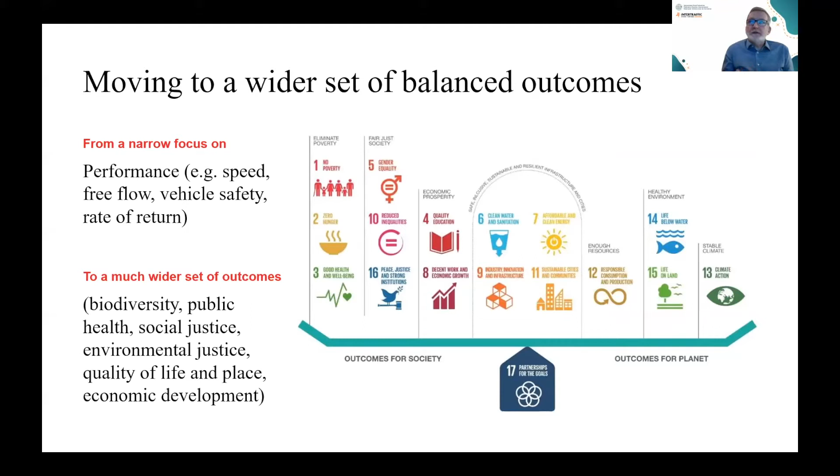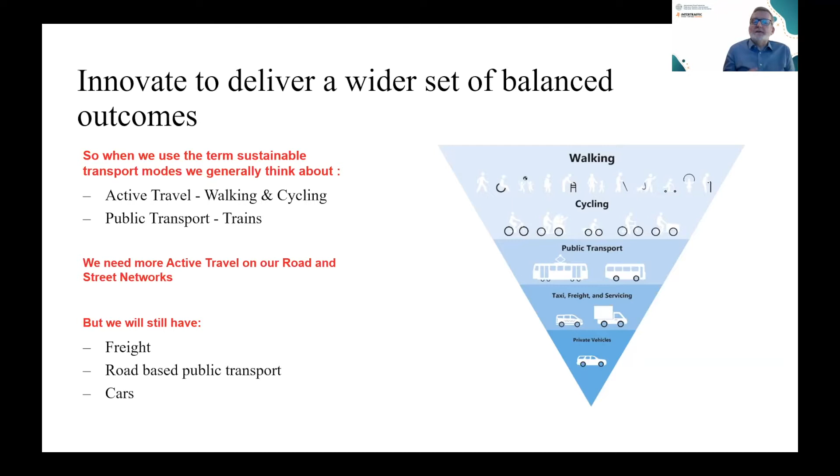They're the outcomes that we want to focus on. So when we talk about balanced outcomes, we talk about sustainable transport, we tend to jump to things like active travel, public transport and trains. And yet we absolutely need to design in more active travel on our roads and street networks. We have to think about the fact that we still will have freight that has to move around our roads. We've got road-based public transport, and journeys that are only capable of taking place in a car. So we have to think about how we innovate to make all of this work well.

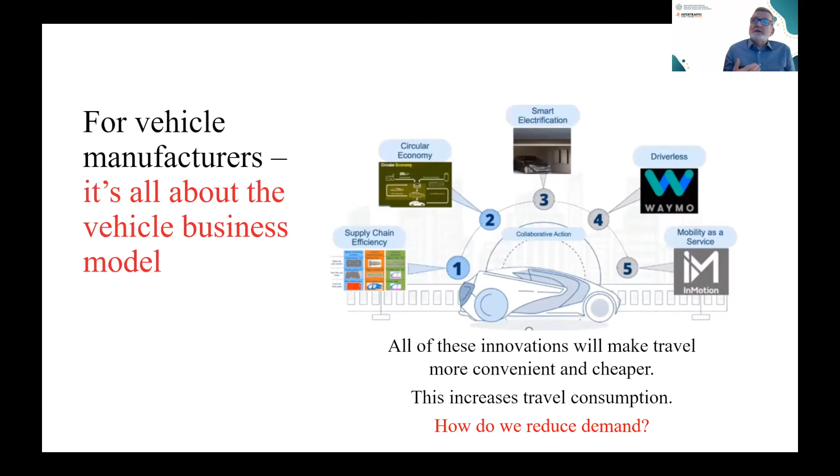For vehicle manufacturers, it often strikes me that for them it's all about the vehicle business model. They're going to make it much easier and more convenient for us to travel in cars. Innovation like driverless technology, different mobility services, different propulsion systems is also going to make travel cheaper. That's going to drive up travel consumption. So how do we manage demand?

So for me, I like to think we need to think about innovation across all aspects of transport. We need to think about how we avoid traveling. This innovation of how we do a Zoom meeting means some of us didn't have to travel today - that reduces demand. Having cities that are well designed so we can walk and cycle to our destination is another way of doing it. And things like road user charging, parking charging - they manage demand as well. And then we think about shifting to more environmentally friendly modes of transport. And only at the end of that do we think about the vehicle propulsion system.

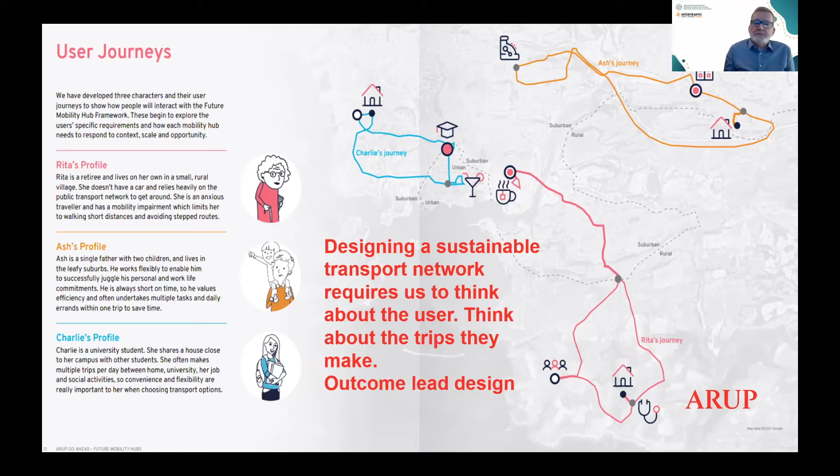So I want to delve into rethinking how we think about transport. Designing a sustainable transport network requires us to think about the user, how they make trips, what they're trying to do as they make their trips. In IRF we call this outcome-led design - we're trying to think about the outcomes of what the user wants to do. So just think about this for a minute: think about how we can innovate across the whole aspect of somebody making a trip, because transport is about the trips that people want to make.

So if you think about somebody who is working, is a parent, on their way to work they have to make several components of their journey. Their journey will include bringing their child to creche or to school, maybe picking up a coffee or a newspaper on the way. Technology can enable people to plan their trips in a much better way - we have information on our phones now about congestion. And when you think about it, we don't travel the same way every day. We adapt what we do depending on the circumstances of that day, what's going on in our lives, what's going on the transport network. We need to think about how we can make those trips more convenient.

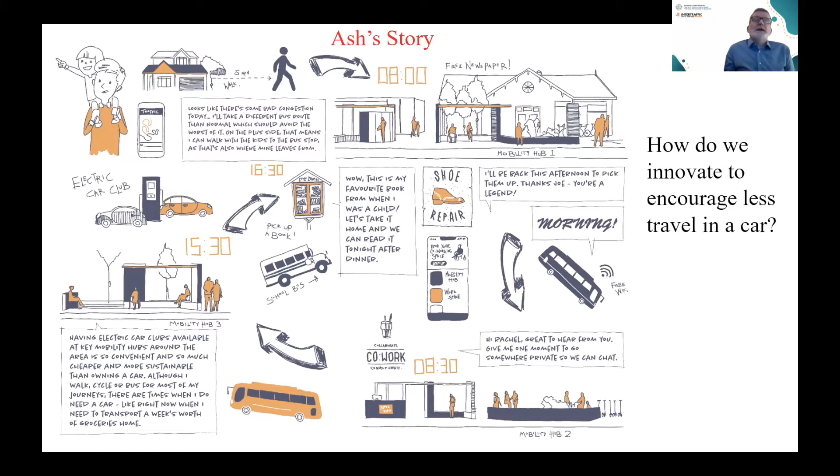We need to think about everybody. I'm a middle-class, middle-aged man - I need to not think about myself when I'm designing transport. We need to think about older people, we need to think about genders, different backgrounds of people. We need to think about all of the trips for all of the users all of the time.

So let's think about how we join a little bit of all of that, thinking about the trips that people are making, and let's innovate how they're going to do their trips. This is a simple concept we've developed with Go-Ahead in the UK - it's about a future mobility hub. It's about how do we put things on our road networks that make it easier and more convenient to use public transport. So it's not just the public transport we need to design for - it's all the ancillary facilities that people need as they make their trips.

They need to be able to cycle to the location. Not everybody can cycle, so there's going to need to be some amount of convenient parking. You need some facilities where you can pick up that coffee as you get on the bus. And these are not just urban solutions - these also need to facilitate people making trips from rural locations into cities.

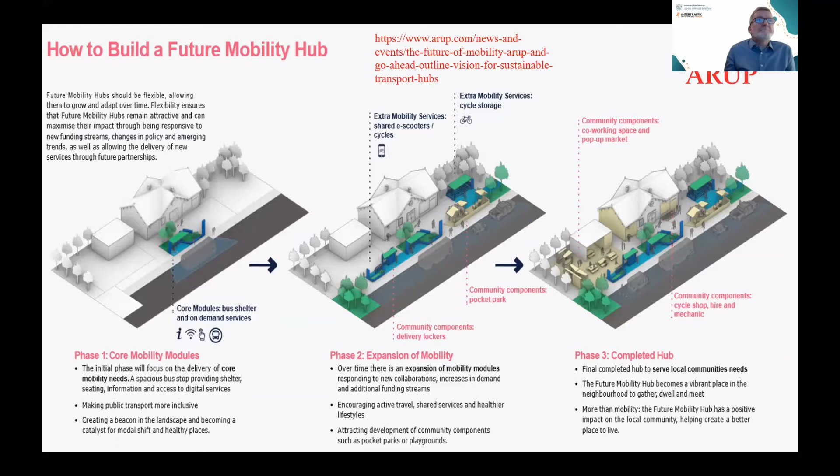So if you need to make this digital design, let's break it down into its components, make it easy to assemble, easy to manufacture so that we can roll it out quickly.

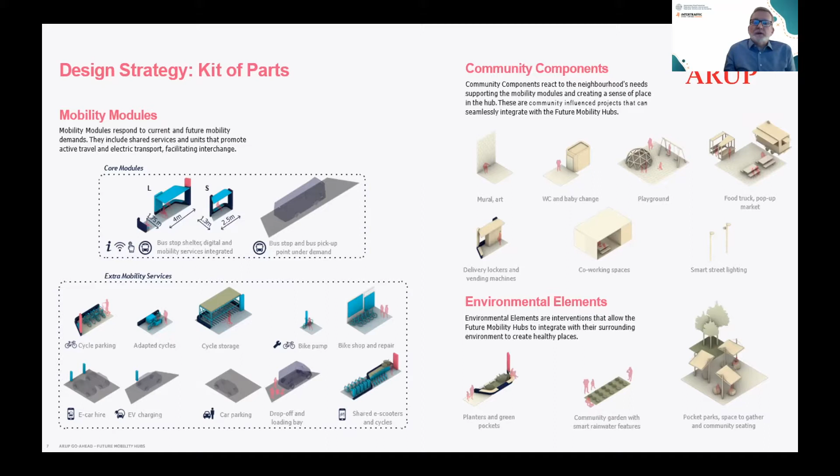And what happens is we apply this gradually. If we do this well, over time, we design cars off our road systems, and then we can do better things in our road and street networks with that space.

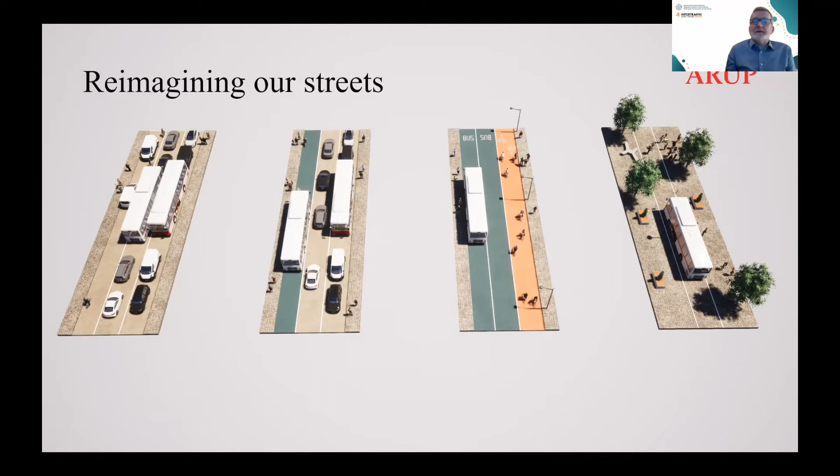I want to think a bit about the difference between what private car design does for a road engineer and how you design public transport. There tends to be a separation between the people who design our national road networks and the people who design our public transport. But what we actually need is more public transport on our road networks, so our road engineers are going to have to think like public transport engineers. In public transport, we think about how we change mode, the interchange effect. We need our road engineers, people like me, to think like that as well, and that's about how you bring the road onto the public transport network.

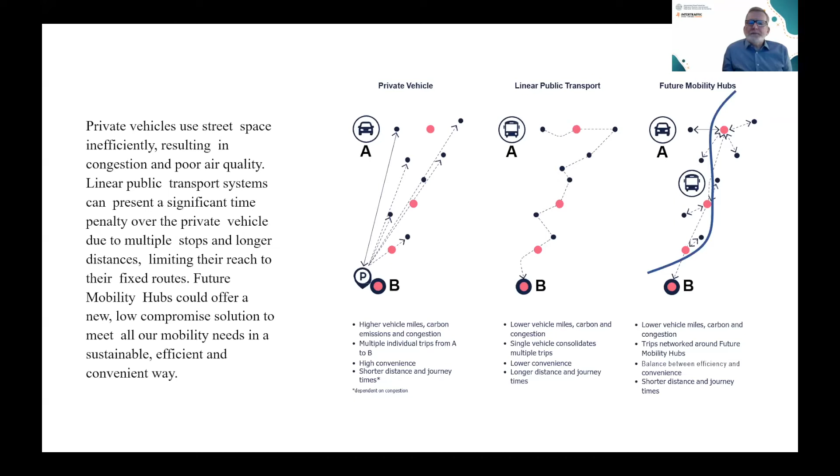I'm going to tease this out a little bit more. This involves us rethinking how we think about people moving. So when I spoke about the different types of people making trips and how they use the networks, that's a different way to think about traveling. It involves us modeling things differently. Our existing modeling systems tend to think that people make the same trip in the same way every day. That's not what actually people do.

So we've developed techniques like agent-based modeling, where we make a synthetic population in the model. We allow the population to change their behavior through the day, and this gives us the ability to predict that people will make different journeys at different times of the day, using different modes and different routes. If we do it well enough and iterate it enough, this makes us better able to predict what's happening. We want to make decisions based on how individuals actually behave, which evolves over time and doesn't always follow a regular pattern.

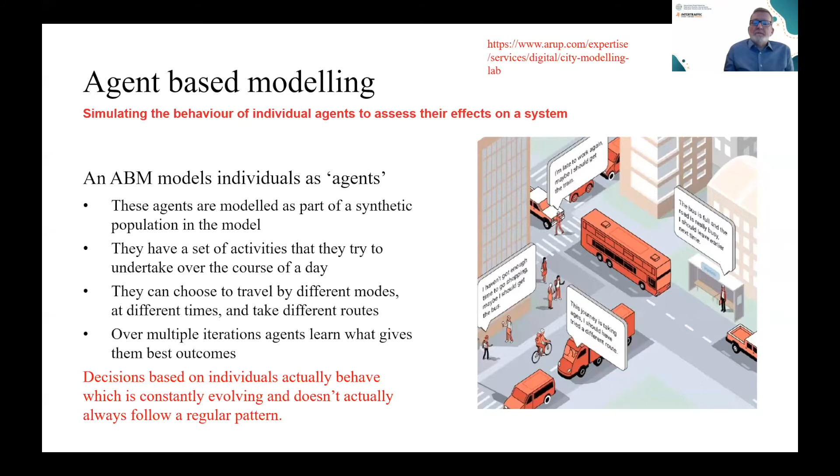So what I'd like to do now is bring this thinking onto a road network. I'm going to go through six themes as we do this. I forgot to say, a lot of this thinking is on our website at arup.com.

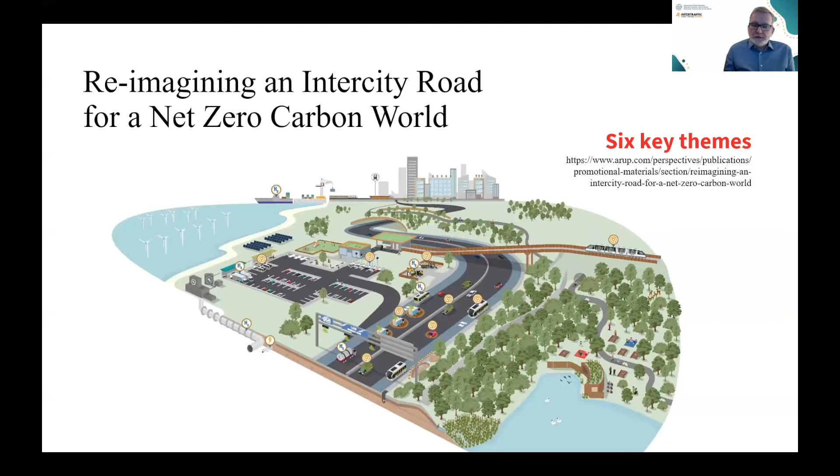You're beginning to hear me talk about thinking of our road network as a multimodal platform, which allows us to deliver sustainable mobility. We need to innovate the way we think about our road networks to achieve that. Rather than thinking of a road network as something just for one mode, where the trip is completed in one mode, for example a car, we need to think about people changing modes as they complete their trip. We can imagine people driving to the edge of the city, changing mode onto more sustainable, more convenient modes to travel into the city. So we have to allow for the interchange between the car and the train system, as you see on this graphic, and think that maybe people will be cycling to these locations. How do we actually think about that?

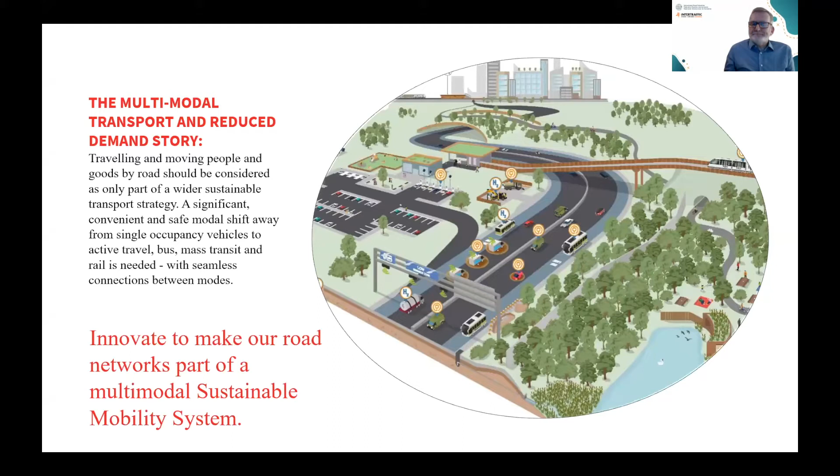Let's go a step further. The transport network is part of a transport system, and the transport system is part of a system of systems. So there's another concept we can think about: the land use story. Our road networks take up a massive amount of land, and maybe we can use that resource for more than just the road network, for more than just the transport system.

This is about thinking how we bring ecosystem services into our thinking. How do we design that in? How can we maybe use all that road network we have for biodiversity net gain? Our road networks would have removed biodiversity when they were constructed, and there's an opportunity to begin doing a bit of regenerative design, trying to put back into our environment some of the things we've taken out of it.

The example I show here on the screen is where we've used the road corridor as a linear network. It is an ecological corridor for flora and fauna. We reconnect it with other ecological corridors, and it becomes part of a refuge within an intensely managed landscape.

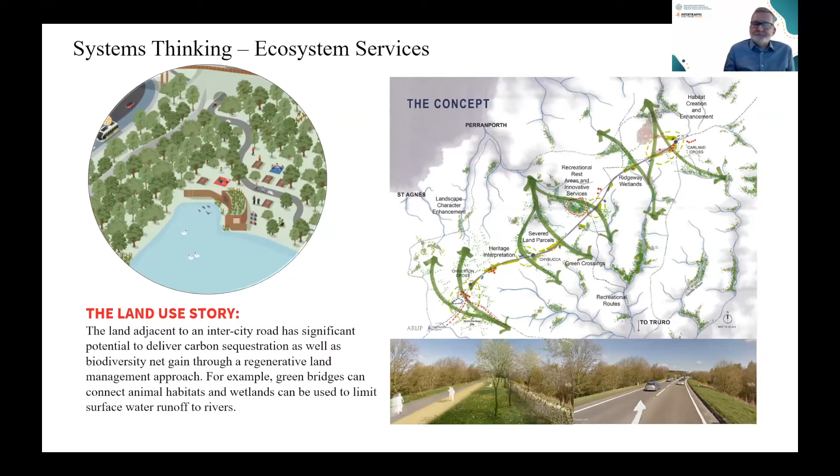Let's just take that a bit further.

So we know we need to reduce emissions from transport. We also need to manage the carbon that's used in the operation, maintenance, and construction of our road networks. This is where we bring in the innovation so we can think about how we apply the circular economy in detail.

A couple of concepts worth thinking about here: we need to maintain what we have, we need to carefully retain the value. It costs a lot of money to construct our road networks, so we need to retain that value. We need to optimize what we already have, and it's only then, once we've maintained and optimized, that we get to think about building new networks.

Maybe we don't need to build anything in the first place. The circular economy begins at R0 or R1, where you can retain what you have, rethink what you're doing, and maybe you don't need to build anything in the first place.

A great example here locally is a project the team in Amsterdam worked on in the Netherlands, the Van Brienenoord Bridge. In the refurbishment of that bridge, one of the arches, we removed the arch, took it away, completely refurbished it, and put it back into place for a new life. That involved a lot of innovation — in this case, the digital analytical techniques we used to analyze the bridge.

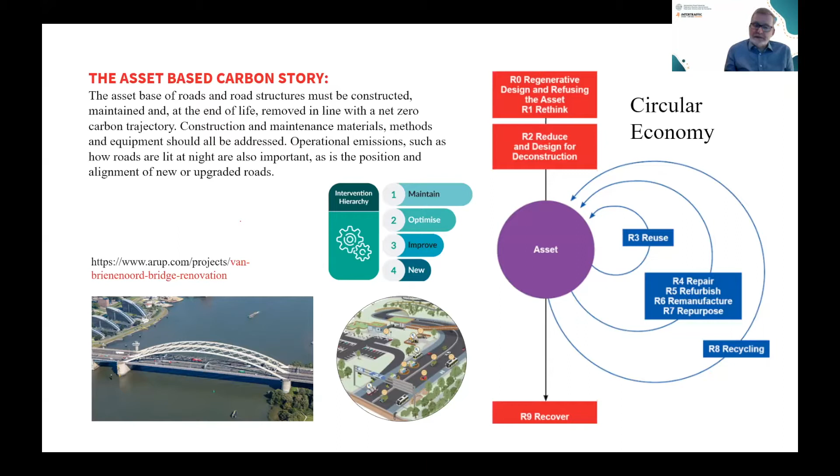Thinking a little further into the circular economy, what's that going to look like in practice? What I've done here is taken Stewart Brand's concept of shearing layers, used in building design, and applied it to road construction.

As engineers, we sometimes have an obsession about designing for durability. Maybe we need to think about the fact that not everything lasts forever. We have some things that don't last particularly long, and we need to think about how those components of what we're building will be deliberately reused, recycled, or repurposed.

If you take the asphalt layer, the upper layers need to be deliberately designed so they can be reincorporated into asphalt for a second life, maybe a third life. We need to put the components we know will be replaced in places where they can easily be taken out and replaced, without requiring more durable components to be broken out.

There are other components to that too. What I'm beginning to talk about there is designing for disassembly. We need to do life cycle analysis on what we're designing and providing, so that we come up with the right decision, both in terms of reusability and the cost and management of the material.

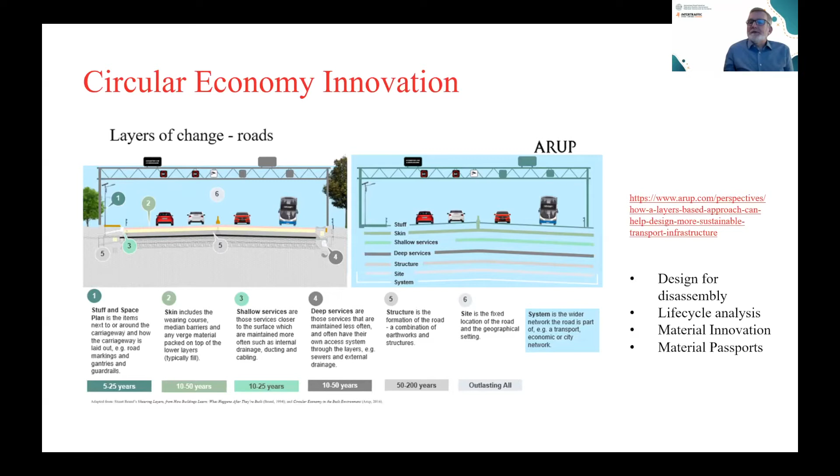That brings us into innovation in terms of how we do our asset management and building information management, so that we have digital twins so we can optimize how all of this works.

So another thing we can talk about — I've gone a bit over time — is that we need to design for low emission vehicles. We need to not just think that having low emission vehicles will solve the problem. We need to focus on reducing the amount of travel, have clean air zones, and enable people across all economic circumstances to avail of this technology.

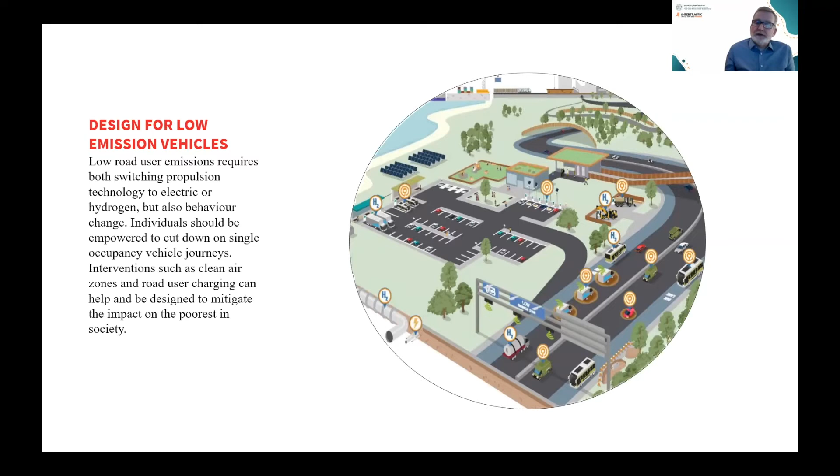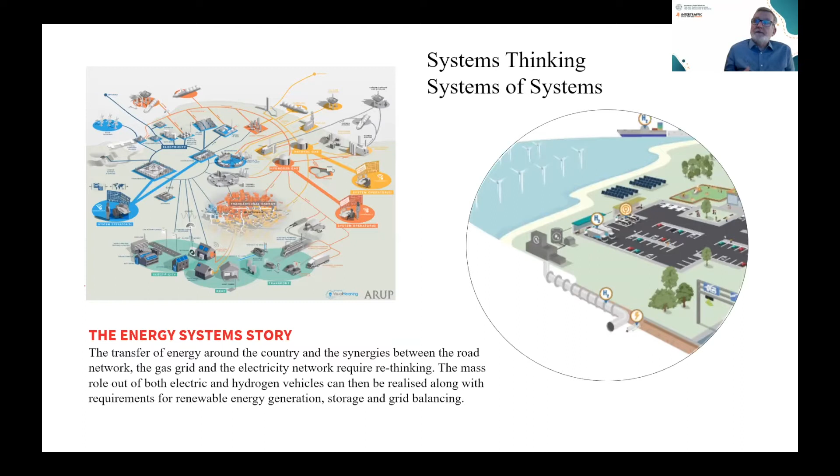I want to briefly mention systems thinking — the systems of systems in terms of ecosystems, but that also applies to the energy system. Our transport system is going to interact in a much more particular way with the energy system, and we need to think about how our transport system can deliver innovation for the energy system as well.

Technology and digital — we all understand that how we plan our journeys is going to improve, how we use connected autonomous vehicles is going to improve what we do, and apps are going to make it easier for us all to travel.

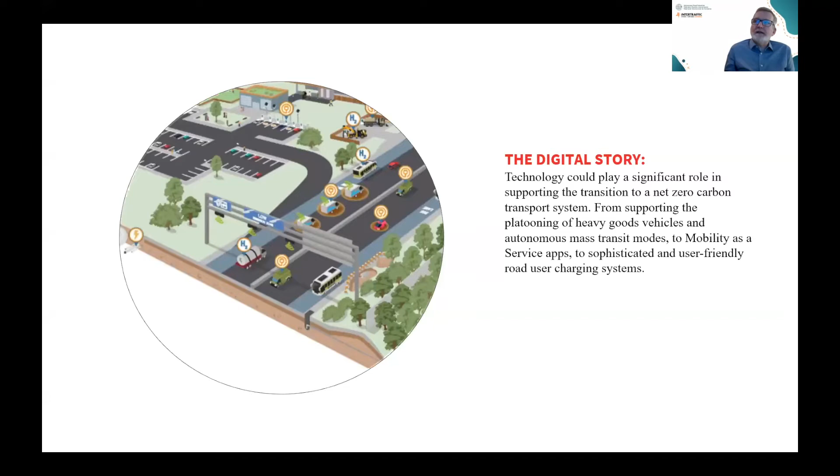I'll leave you with one final thought: we need to think about how we actually use that technology to take away transport, if you like. This is a piece of work we did in Singapore. I'm talking about autonomous vehicles, trying to think about how we shift the innovation away from the vehicle itself.

Instead, the innovation shifts to the use of space — using the autonomous vehicle as an opportunity to take away the space allocated to cars, so it can actually be used for active mobility, regenerative design, and climate change resilience.

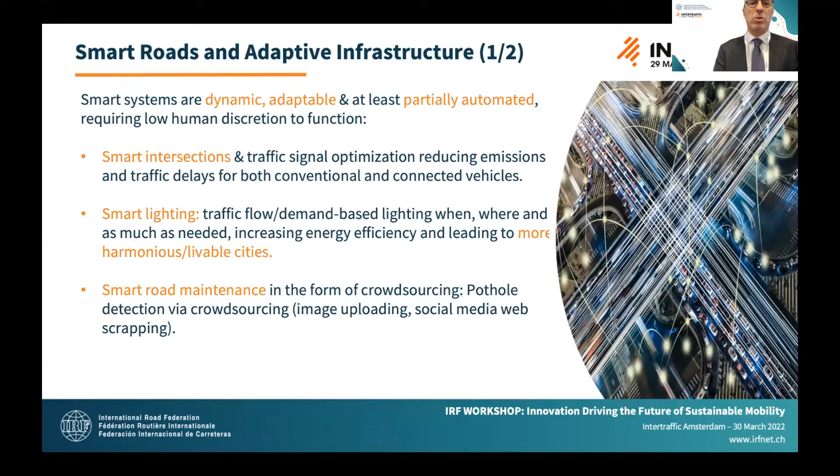In fact, smart roads and adaptive infrastructure are supposed to be dynamic, adaptable, and at least partially automated, still requiring human intervention. We're talking about smart intersections with traffic signal optimization, smart lighting, smart road maintenance. We also talk about dedicated lanes for connected and automated vehicles, optimizing on-street parking, green light optimal speed advisory, road use pricing, and there are quite a few impacts at different levels.

Direct impacts on the road user, on the authorities and the operators, systemic impacts within the transport system boundaries like modal split, and of course wider impacts exceeding transport system boundaries with emissions, with health, with every sector. So we need to estimate and anticipate these impacts.

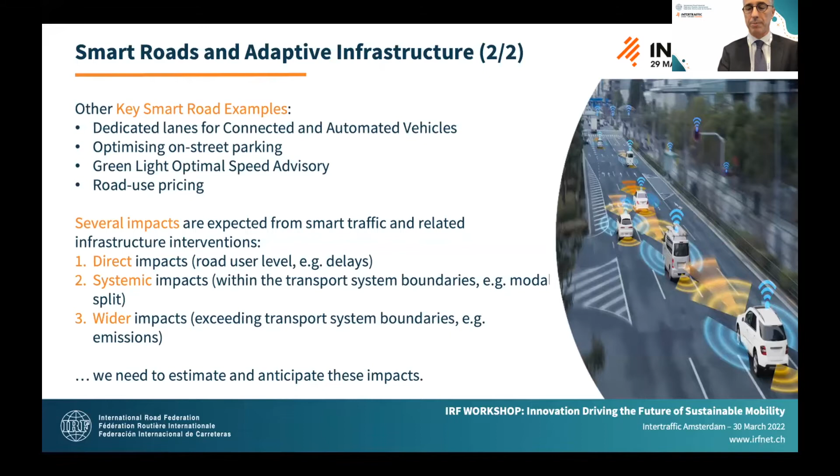In terms of smart motorways, they are expanding quickly, not never as quickly as we wish. There is mandatory speed control, automatic signal setting, and speed enforcement using automatic camera technology, which are more and more present in smart motorways. There are significant gains, potential significant gains in environmental impacts in order to upscale traffic volumes, platooning, and their percentages of use.

However, smart motorways have not yet improved road safety uniformly, and quite an important percentage of drivers are not even aware of the new traffic safety and environmental potential of new systems.

The key challenges for smart roads, of course, is open and big data. The silo effect today hinders data sharing due to privacy, legal liability, intellectual property, competition, cybersecurity, and cost-related issues, and we have to overcome them.

We need a smart solution with systematic resilience, scalability, timeliness, and interoperability. Artificial intelligence has to be explainable and fair in order to fully exploit big data. And policymakers have to develop digital skills themselves in parallel with the progress of technology.

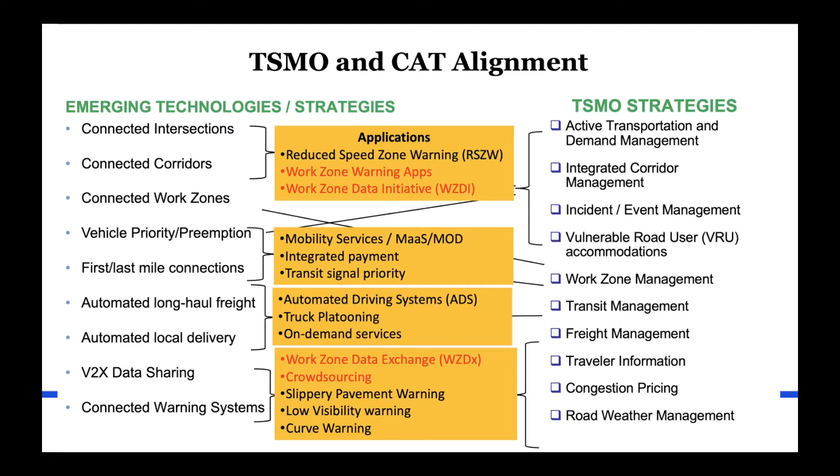If you want to sustain mobility, you need to make sure that the strategies are in place. They are the driving engine to implement the technology for the benefit of the network and for the benefit of the users.

This is another important point: we are currently working on key use cases. For example, AV applications in work zones is one of our prominent use cases. Some of the TSMO use cases becoming very popular include road weather information systems, work zones, connected and AV vehicles, red light warning, arterial operations on red light warning, reduced speed zone warnings, and corridors.

Connecting corridors with technology, basically modernizing signal control cabinets and ensuring signal operations are efficient, is one of our top use cases, including lane departure for arterials as well as interstate systems. The multimodal intelligent signal system includes transit signal priority, but also connects with other modes like metro, light rail, and heavy rail, making sure those intersection points are well covered.

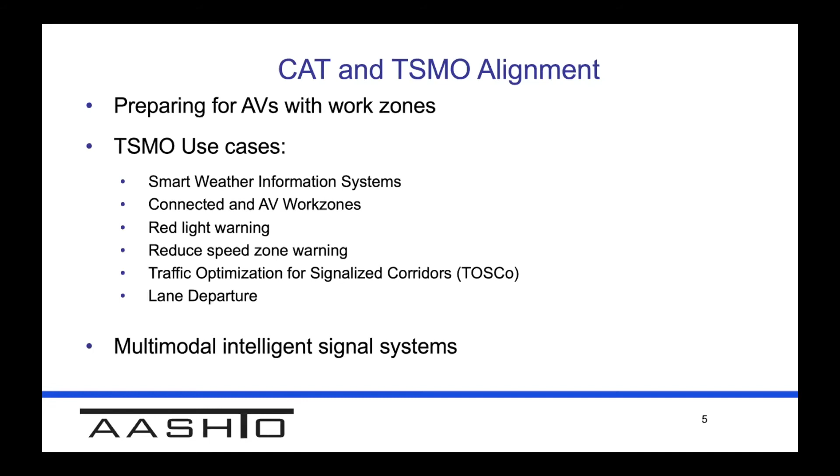One of the speakers brought up outputs and outcomes, I'll speak to that in a minute. One important thing we've come around to is the decision support system. One of the major TSMO initiatives was Integrated Corridor Management, ICM systems, and the DSS system that came out of that has become a sustainable model to ensure any TSMO strategy implemented has an actionable decision support system built around it—whether it's a weather program, incident management, or congestion pricing. What transportation decision comes out of those implementation efforts to help manage the system in a timely, responsive manner?

That's one of the key things we're looking at, implementing an artificial intelligence approach. Predictive algorithms going into the DSS would make it more robust and modernized to accommodate emerging technologies into the program applications. And then how does it impact the workforce? Do we have the skill set available to absorb emerging technologies and accommodate these latest innovations into the program?

Go to the next slide, please.

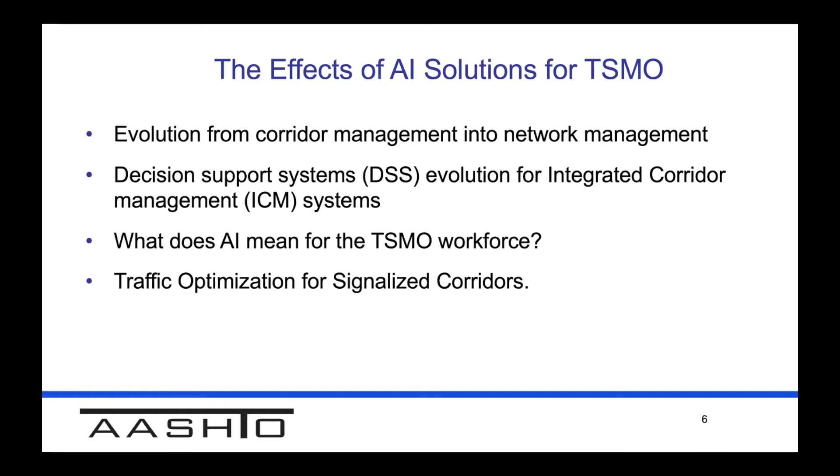This is another big paradigm shift we're experiencing with our stakeholders. There were outputs, a data-rich information pool—we've talked about that in the past. Sometimes there's more data, but no information out of that. Now, in a similar context, we're looking at: are we just focusing on outputs, and are we not focusing on outcomes?

If you implement a congestion pricing strategy or active traffic management strategy, besides the strategy itself clicking and all technologies working, giving the desired measures—for example, reduction in delay, or congestion pricing giving enough balance on traffic volumes on general purpose lanes versus the Lexus lanes or toll lanes—is it really helping the user achieve the end product of mobility? That he reached his destination, and connected with first mile, last mile services efficiently.

There's also safety. If you make a good weather prediction, is it trickling down into shifting the peak hour from a weather event to a non-weather peak hour? Those are the outcomes that are important to measure. That's where we're focusing—how the strategies and technology implementations I presented will ultimately connect back to the outcomes.

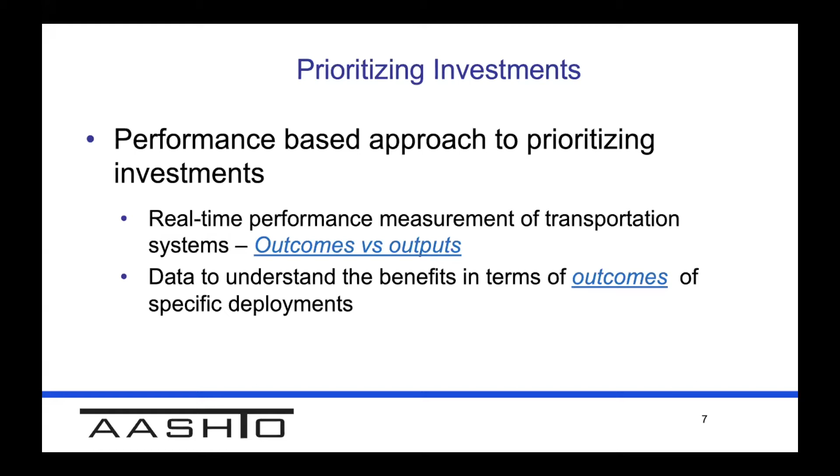Next slide, please. To accommodate all these discussions, we've also embarked on generating a transportation operations manual. This research has been in the works for the last 24 months, and this year we're nearing completion—balloting within our AASHTO committees and adopting the manual by end of this year, probably releasing it by TRB 2023.

This is our major flagship project this year, and it connects with all the earlier strategies, outcomes, and technology implementations I was talking about. We'll be happy to share this as it becomes available with this new committee being launched today, which I'm sure will be very interested in interacting with our AASHTO committees as well as this manual. Last slide, please.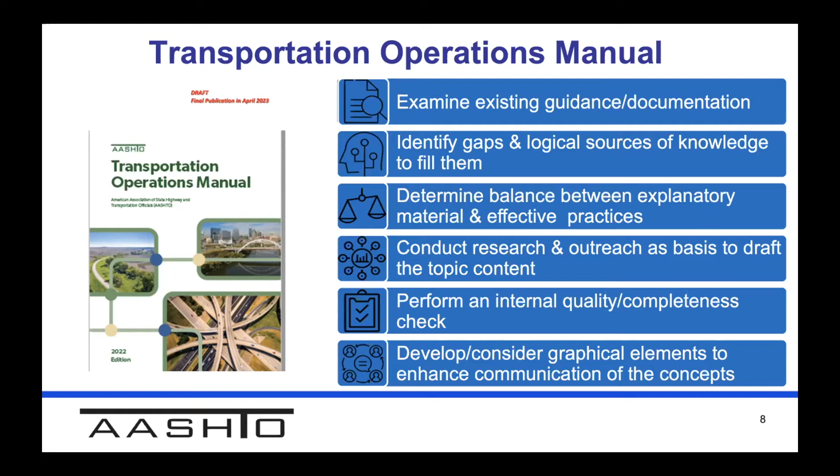This starting step is expected to add more companion documents, making it more robust and available mainly in digital version. We'll take more input from industry trends and complete it in future years as a long-standing available service tool for our TSMO communities within the United States and outside as well. Those are my takeaway points, and thanks for the opportunity—I'm here for any questions.

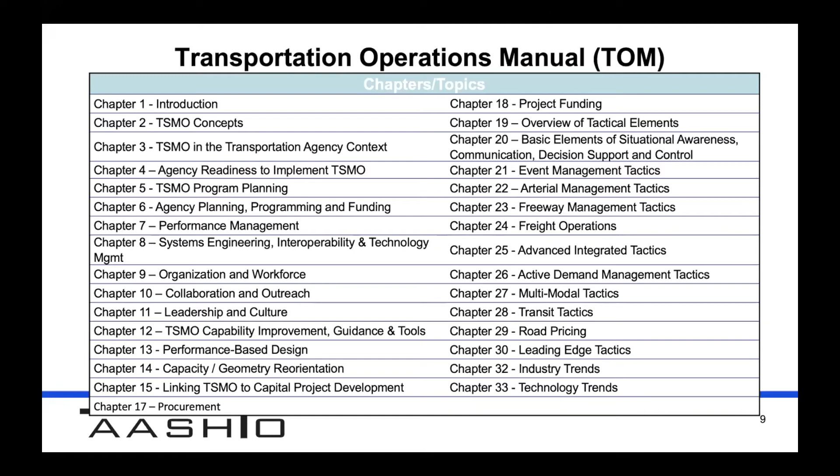Thanks a lot, Kumara, for being with us this morning. I wish you a great day there in Washington, and I look forward to working with you on this new committee we're launching. We've already cooperated with AASHTO on the committee we have on connected and autonomous mobility, so we're definitely continuing on that line of work.

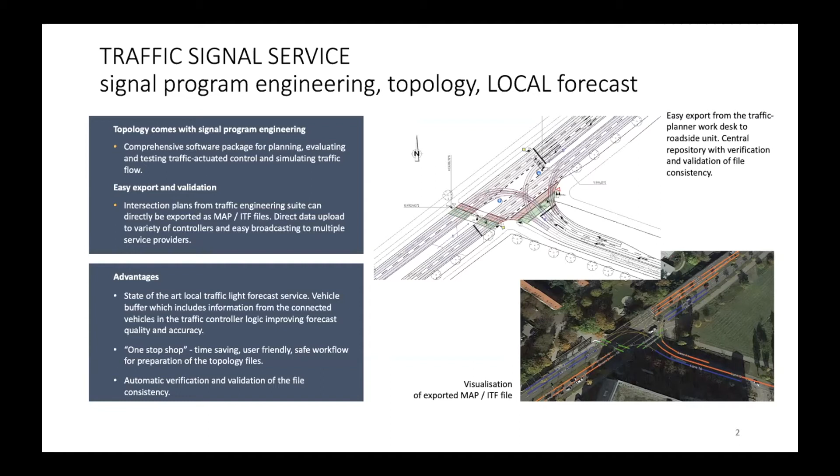This tool started at the university. Traffic engineers are learning with it how to plan and configure a traffic system in a city. Cities are using it as well as consulting companies. It's really a digital tool, and we use it a lot in Germany as well as in the rest of the world.

The next use case is public transport priority. Here we have real-time communication between the bus or tram and the traffic signals. This helps a lot to improve the customer journey of the people who use the bus, as we have better consistency in the schedule—buses are more on time. CO2 reduction is also an argument here, and we can scale this over different intersections into a corridor.

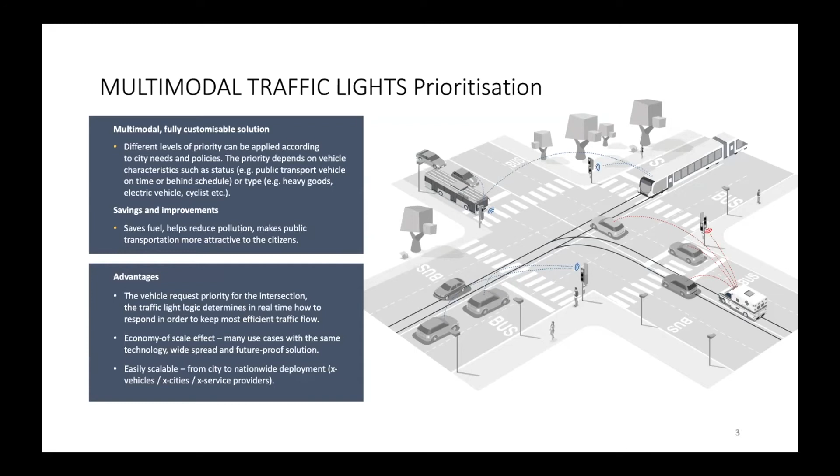A similar use case from the same technology is emergency priority. Everybody knows the congestion spillback when there's an alarm of an emergency vehicle and everybody drives onto the intersection and stops, while the vehicle tries to get through. With a real-time connection to the traffic signal and the intersection, we can directly manage the traffic as well as a corridor so the emergency vehicle has a safer path through the intersection. It's a low cost and quick deployment solution.

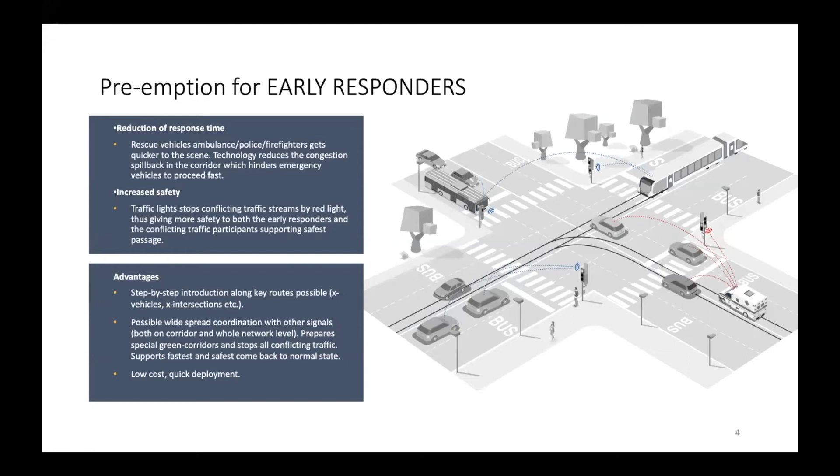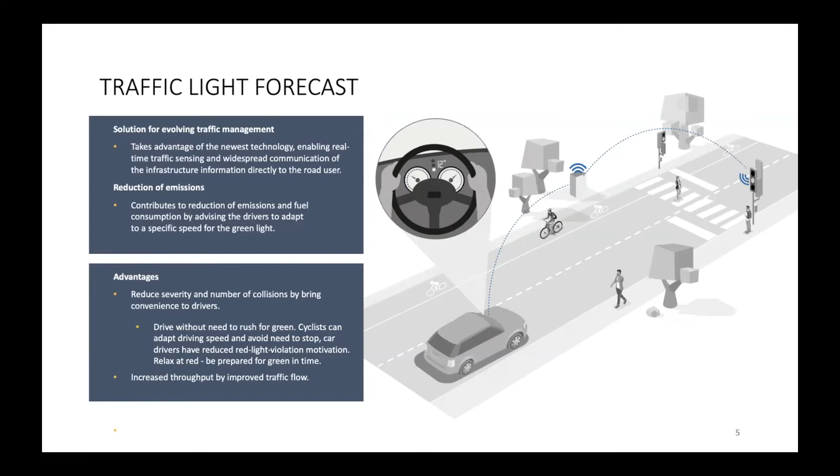The traffic light forecast is another one. We provide this information not only in the car dashboard, as you see here, but also on a mobile phone. So as a cyclist on a bicycle, you can see if I drive at 20 or 18 km/h, I'll get the next green light and won't need to stop. Same for cars—you don't have the pressure of not knowing if you can make the green. It relaxes the driver heavily and also improves traffic flow in general.

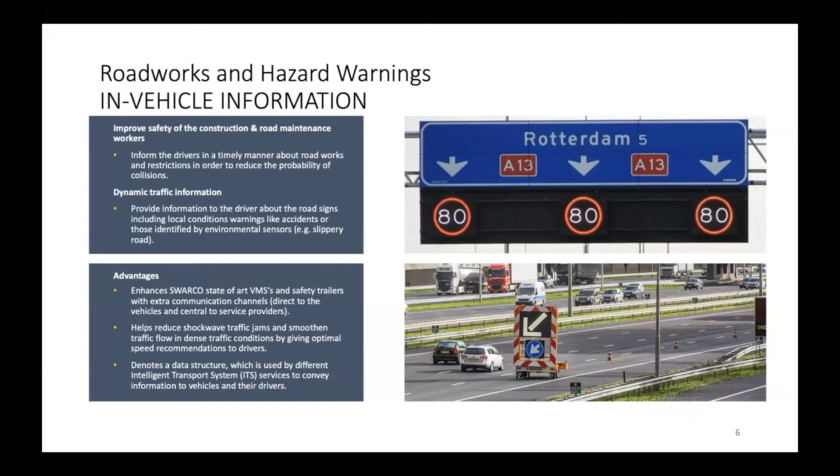The next one is roadworks and hazard warnings. With in-vehicle information plus variable message signs, including mobile variable message signs as seen in the picture, we take environmental sensor and camera data with accident information or slippery conditions or other incidents, and then we can smartly manage the roads—for example, from 3 lanes down to 1—to help reduce shockwave traffic jams. Another example is hard shoulder and emergency lane management in a smart way, which also helps keep traffic smooth.

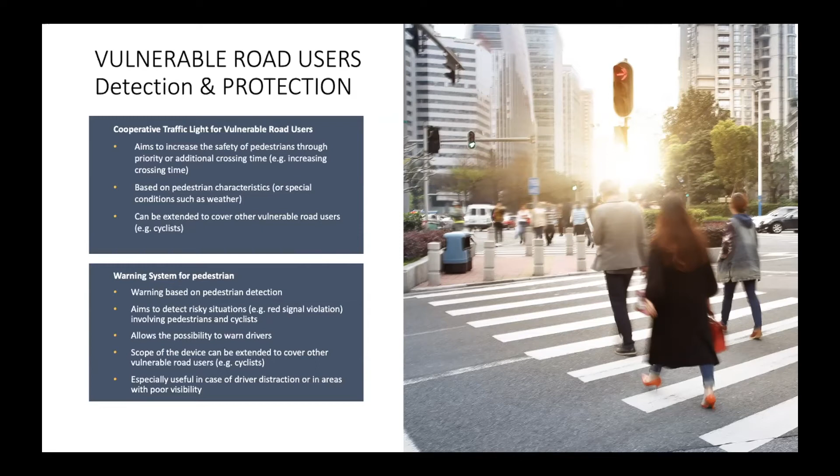Another very nice use case is for vulnerable road users. Here we think about bicycles at an intersection with trucks turning right, which sometimes have a blind spot and can't see the bicycles, leading to bad accidents. With cameras, we can analyze if there's a bicycle and a truck in a critical situation, and we can, for example, give the truck driver 6 seconds longer red to secure the crossing of the cyclist over the intersection. This heavily reduces bicycle accidents in the city. Another use case is also for pedestrians.

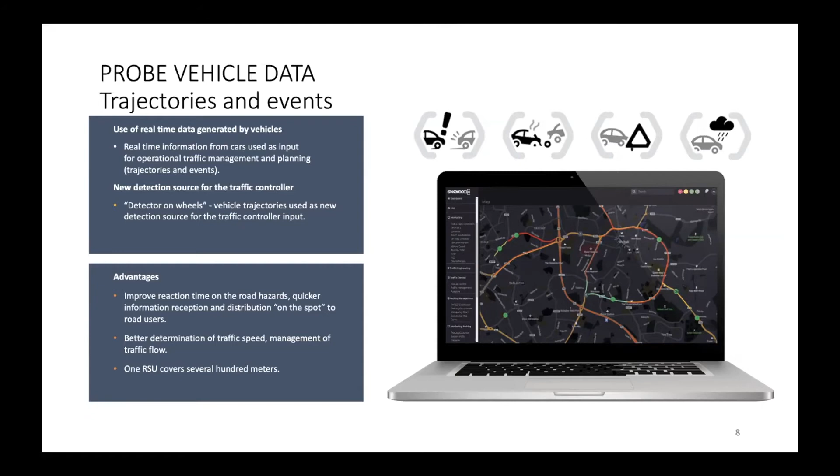Then we have the heat map of the real-time traffic data coming from different sensors and car communication, which helps us see exactly what's happening in the city, where the traffic jams are, etc. And then we can directly improve our traffic management through this in a specific way.

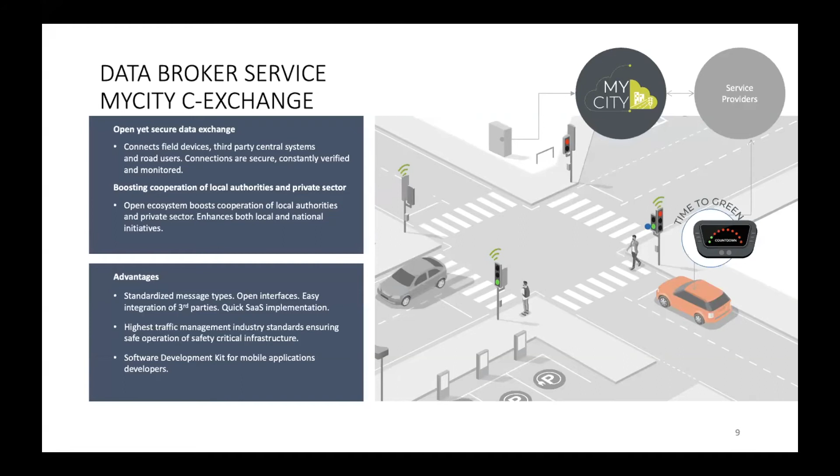The last one is the data broker service. We have complete analytics of the intersections with data about pedestrians, cyclists, cars, trucks, peak times, trams, etc. And we can provide this in an open interface to the city or to third parties as a service, for applications, also for startups interested if they want to create special applications on it. And this is a very good data source for any new use case in the future.

And that's it already. Thank you very much. And if you have questions, I'm here.

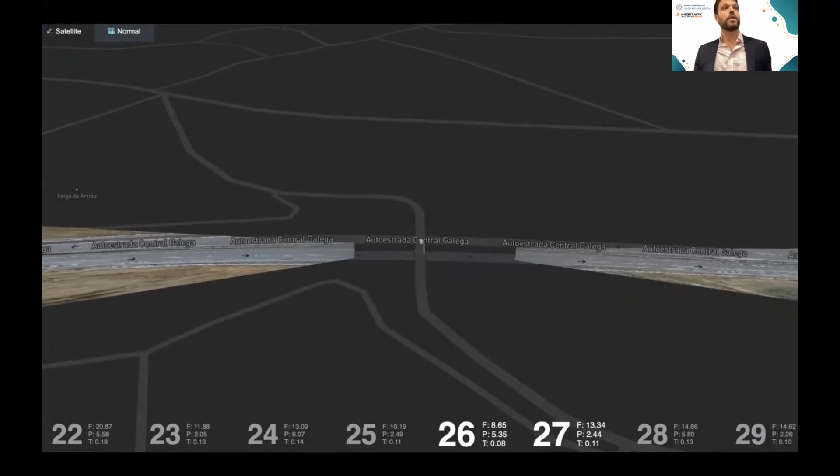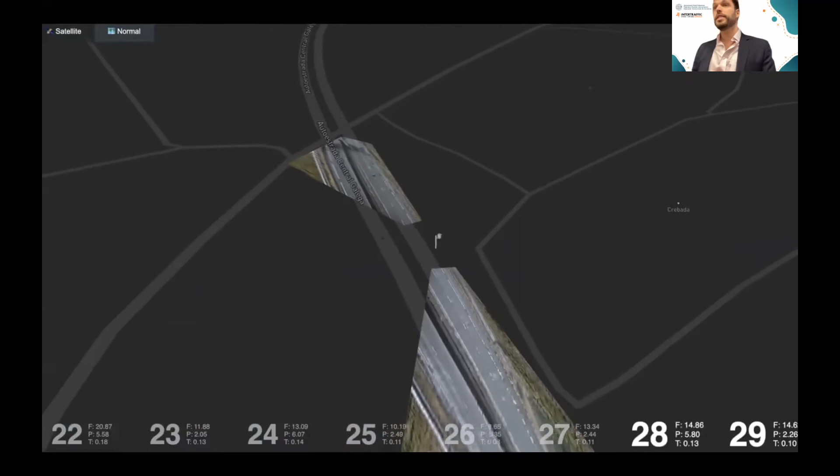So what we've created is a system that automatically detects exactly where the camera is looking and transposes that perfectly onto your map. What that means is that when you see, in this capture of a live road, a car in your camera, you now see it actually driving along your road precisely.

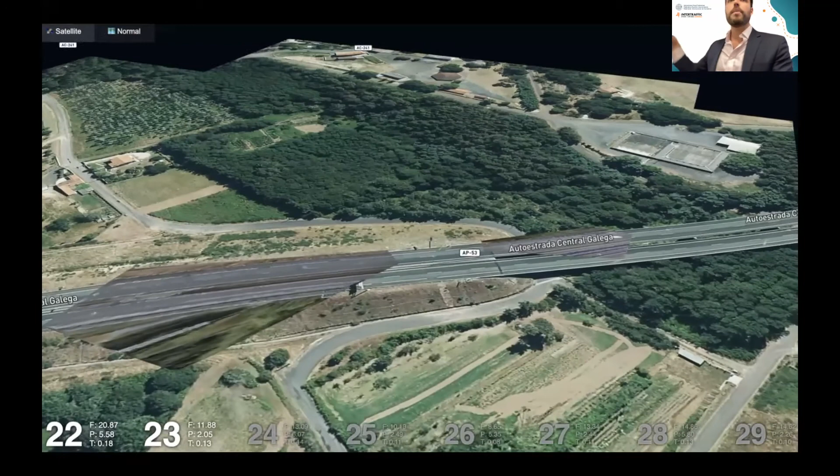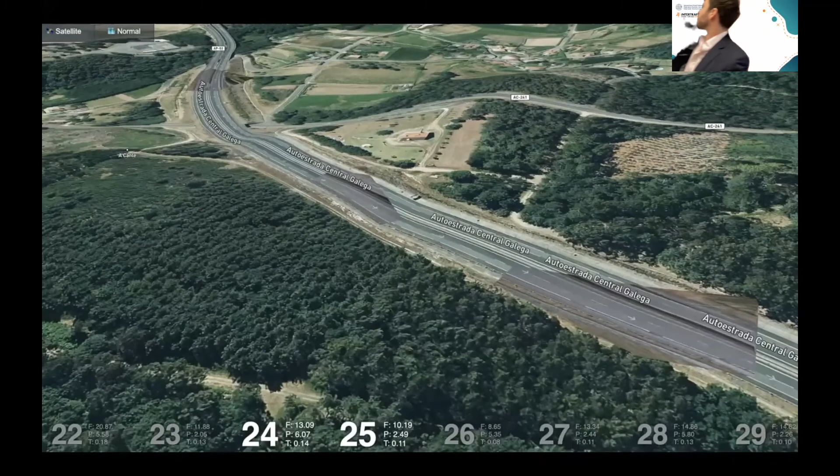Now, the reason that's important is that when you have that Waze event in a specific coordinate system, you're able to know that's the same thing I see from my camera. Here you see this transposed on a satellite image showing you how precise this automated process is. So now if I have an incident detected here, and down the road I have congestion from a loop, and then Waze coming up, all this is interrelated on the same coordinate system. And that is why I'm able to trust it better.

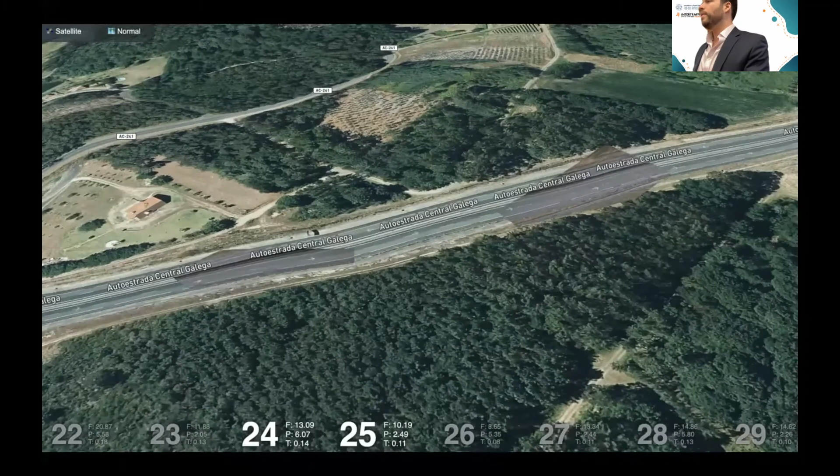That's just one example. We could talk about radar, we could talk about connected vehicles, but later. This can even be provided, if you have your own ATMS system, as a module within that ATMS system. What we found is a lot of roads have nothing because a lot of systems are too expensive. So for those who have little ITS, we provide our own web-based application.

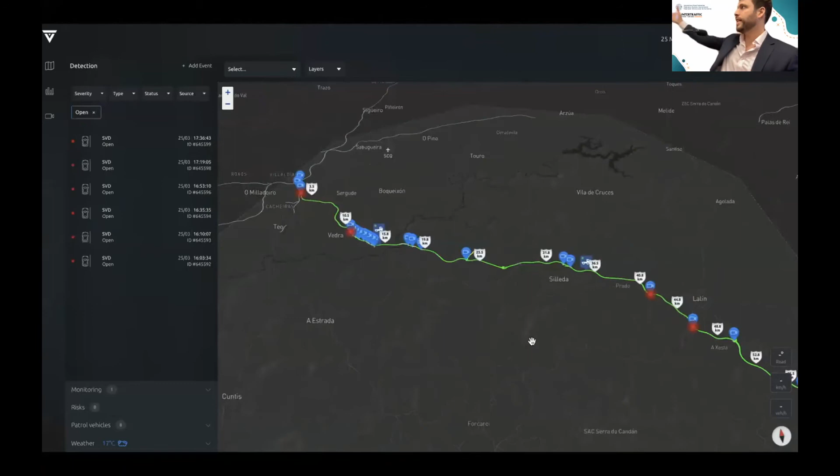So this is Lantern by Valerann. Here we bring all the data sources together. For example, if you have an alert, let's say Waze says there's a stopped vehicle detected, we provide you the alert and its location. Then we show you the closest camera.

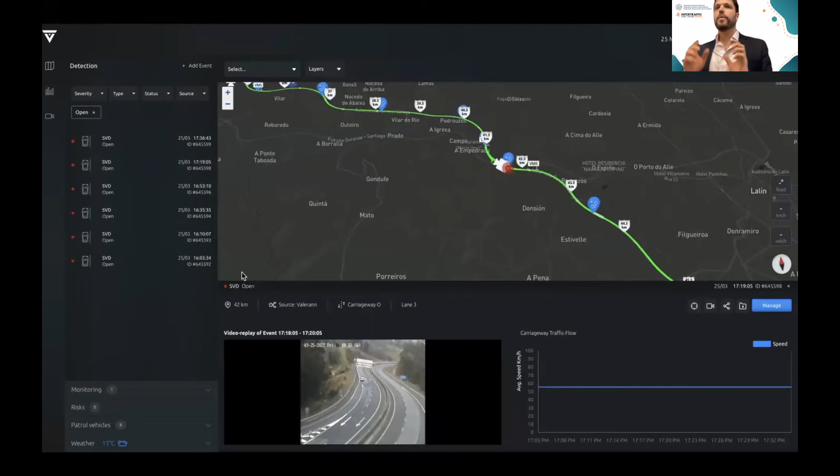We give you both a video capture of that event, so those 2 minutes you see the vehicle as it's actually stopping, because we assess when that more or less happened and where. And then we also connect you to your live camera at the same time, so you can say, oh, is it actually still happening? It's not.

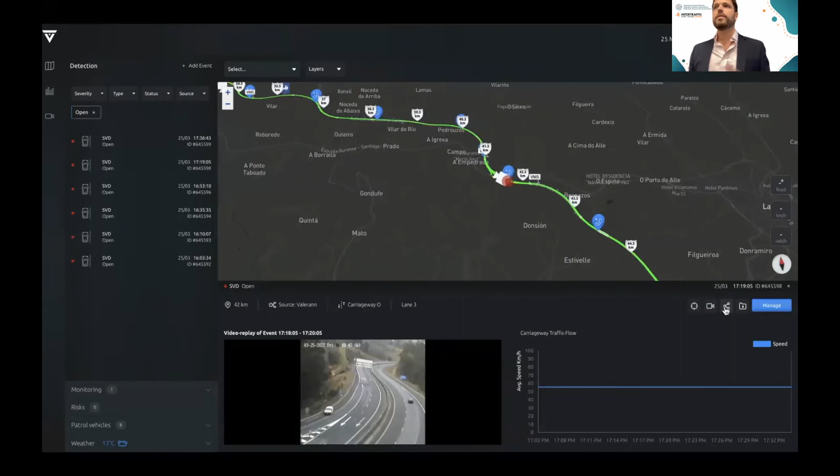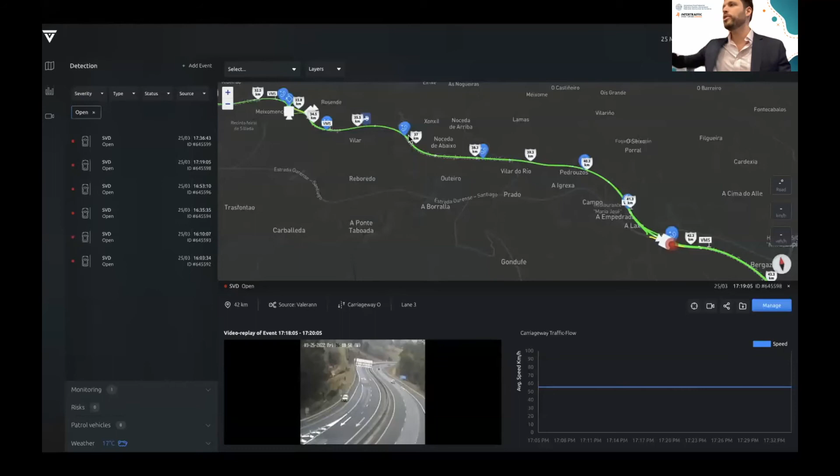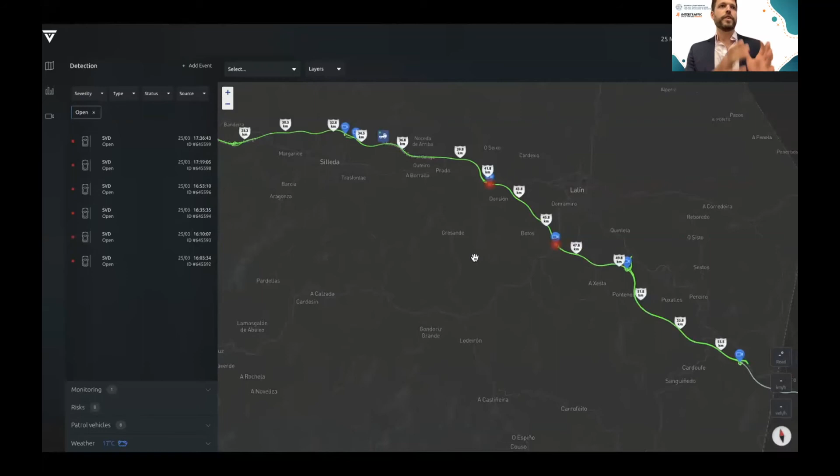Then connect you either to Waze, to Google Maps, to your internal systems, Slack, email, or your emergency response, whatever you need. They can also have access to this if they want to see it, say emergency response here, take a video so you can see what you're going towards. And at the end of all this, if you want, connect your patrol or anything like this. Again, improving your connectivity, improving your certainty, and allowing you to react faster, more relevantly, more effectively to what's happening on your road.

So in summary, Valerann and Lantern by Valerann, what we just saw, we want to help road operators increase safety, reduce congestion, save costs, and engage users on your road to keep them more informed. We do that by facilitating trust in the data you already have. That means you can reduce response time to accidents, identify and react to bottlenecks sooner, start leveraging ITS with reduced cost without the amount of CapEx, as my colleague said before, and also communicate directly with your drivers, so you have a wider, more profound relationship with your users, your constituency.

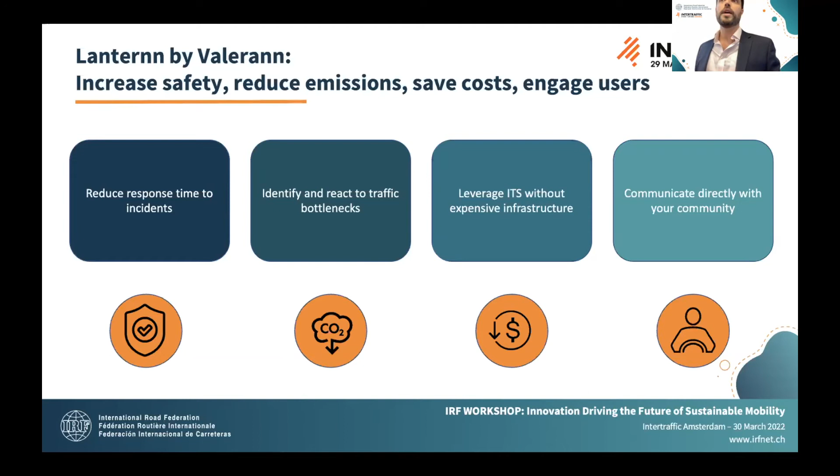And I think it was a perfect conclusion for this session on technology. We've seen tools, we've seen the importance of data and the strategic thinking behind it, and that all together brings innovation in our sector.

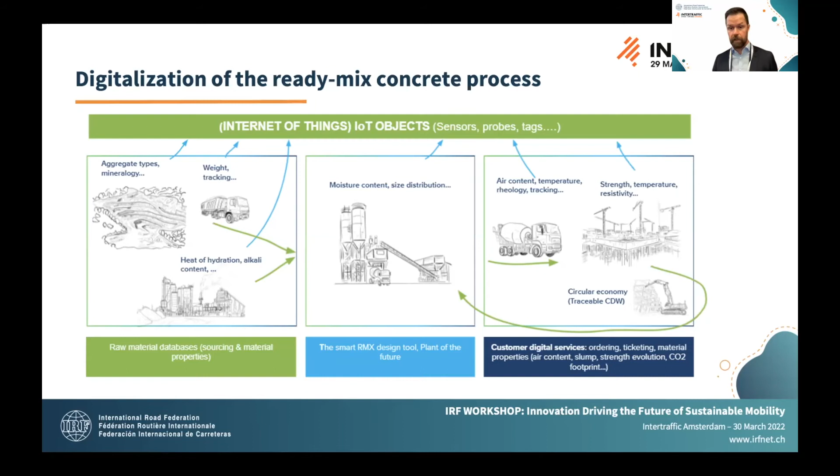So when we provide our concrete to customers, they can clearly determine what the product is that has been provided. If you check it in 100 or 150 years' time, it allows full traceability and allows it to enter the circular economy a lot easier and quicker.

The benefit of this is risk mitigation for customers in terms of mass elements and finite modeling for mass elements. In addition, we're looking at pump simulation tools, which allow us to simulate how far we can pump our concrete, whether vertically or horizontally. The benefit from that is again risk mitigation, but also reducing the requirement for customers to undertake costly and wasteful pump trials.

And then finally, we've got maturity. In terms of maturity, we're looking at maturity sensors in concrete. Essentially, they enable our customers to see digitally what the compressive strength of concrete is in real time. Once the customer can see the compressive strength in real time, it allows them to remove formwork more rapidly on site.

And then I probably should loop back on the thermal tool. Some beneficial examples we've seen are in Australia, more recently with the Transport and Main Roads Authority in Queensland, where they've utilized this tool on a lot of major infrastructure projects. All these offerings will come under the acronym or umbrella brand of iConcrete for the business.

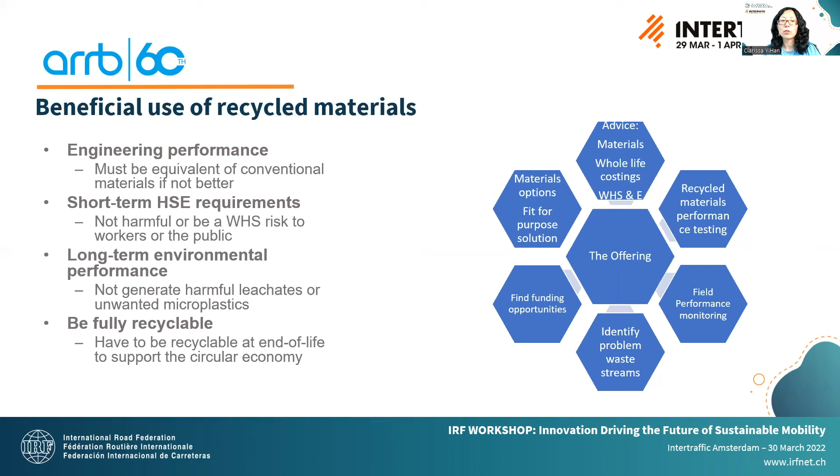On top of that, ARRB also offers a wide range of materials performance and certification services, utilizing our national reference materials laboratories and facilities.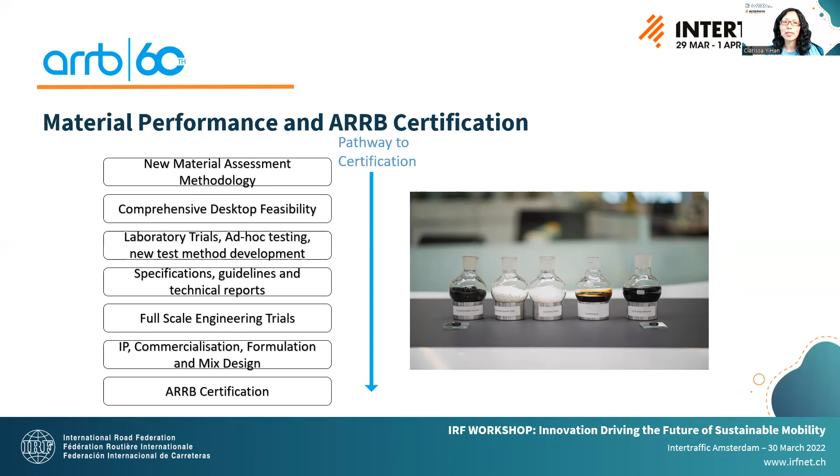We conduct new material assessment services, delivering comprehensive desktop feasibility analysis, implementing laboratory trials, ad hoc testing, and full-scale engineering trials, also developing specifications, guidelines, and technical reports.

Some highlights of our recent deliverables and publications: at the national level, we developed national guidelines, specifications, and best practice advice.

For example, late last year we published the national specification for crumb rubber binders in asphalt and seals for local roads. Early in 2022, we also developed and published the local road specification for recycled crushed glass as a sand aggregate replacement.

Ongoing, we're developing best practice expert advice on the use of ten recycled material flows in infrastructure for the Commonwealth.

At the state and territory level, we deliver sustainable engineering solutions via our collaborative R&D programs with state road agencies. I have highlighted two programs here.

One is NACOE, the National Asset Centre of Excellence, an initiative between ARRB and the Queensland Department of Transport and Main Roads. Another is WARRIP, the Western Australia Road Research Innovation Program, an agreement between ARRB and Main Roads Western Australia.

Both programs reflect a strategic commitment of road agencies to research and development, technology transfer, and capability development, and both provide substantial sustainability programs and projects.

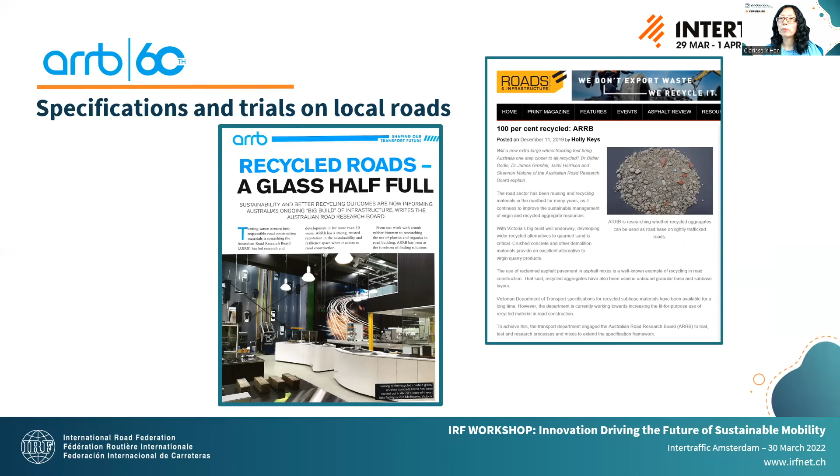This also creates new markets and new jobs, and potentially improves asset durability and performance.

I hope this provides a brief summary of what we are delivering in this innovative and exciting area. Feel free to get in touch if you have any further questions or inquiries. Thanks, everyone.

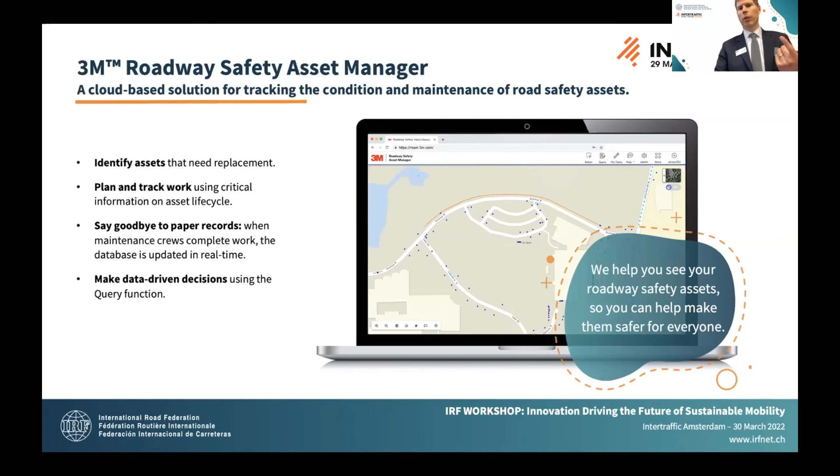Another anecdote on why this is important: we talked to one of our agencies, and they wanted to improve lives, so they wanted to implement a countermeasure.

So they want to replace all the curve signs in their jurisdiction. Well, it took them 18 months to find out where all the curve signs were before they could replace them. So this helps you give direction to your maintenance teams of specifically what assets to do to maximize your budget.

And then the question is, for innovation technology linked to connected automated vehicles and big data, what are we doing now? So we have a collaboration with Mobileye. For those not familiar, it's now a subsidiary of Intel, an Israeli company. They're great partners, and they have one of the sensors that's on probably more than two-thirds of all cars. That sensor is collecting data every day.

So they have millions of cars around the world traveling, collecting all this data. And then the question is, again, what do you do with that data? So we're now mapping this data and merging it into our Roadway Safety Asset Manager software data, so we can do a GIS layering. So instead of a one-time survey every year, we can now get that information real time. And is less high quality data at a higher frequency good enough to make decisions and predictive analytics? We think so, and we're working on that now.

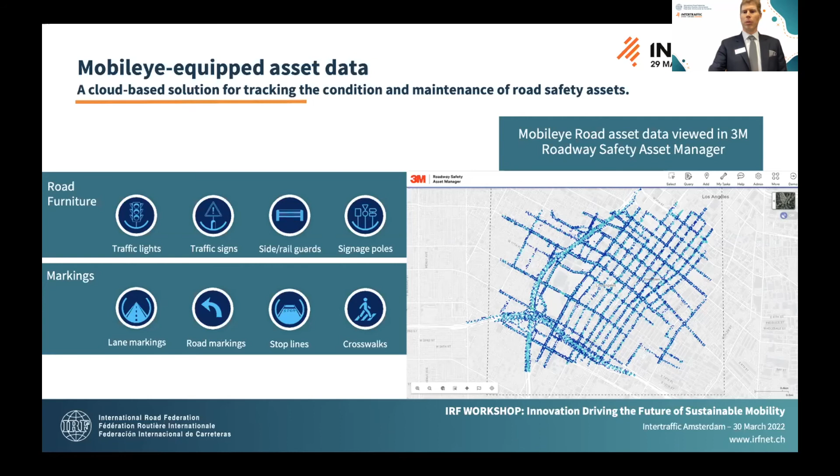So our ask is, we're working on this in the US now. We're looking for other pilots around the world as we roll this out and figure out how we maximize this opportunity with Mobileye. It's a great opportunity for us.

And in closing, so it's the last thing: it's a software solution. We link to connected automated vehicles, because what do connected automated vehicles do? Connected vehicle means it's connected to infrastructure, it's connected to the cloud. Automated means it runs by itself. On the automated part, it's reading pavement markings, it's reading signs to run by itself. So how do we make sure we have those assets as good as can be for safety purposes? This helps us replace those assets in a timely manner.

So it's a comprehensive asset solution. It's good for, you can query data, you can figure out which assets you need to replace, you can send out to your maintenance crews. Maintenance crews can input the data, they can record it, and it comes back, and it's all in one nice solution. This is one of our modules in our suite of solutions. Being one of the last speakers, I will stop there. So, thank you.

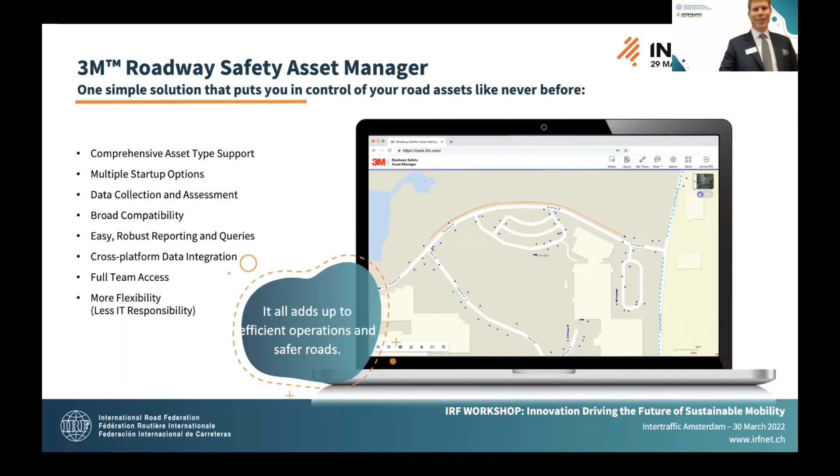You're actually not the last speaker. We still have, in this long, quick journey, Meran Eskandari Torbagan. There I see Meran. Good afternoon, Meran. Thank you for joining us. No problem, pleasure. Lecturer in Infrastructure Asset Management at the University of Birmingham. I'll immediately leave you the floor to talk about climate resilient, sustainable road pavement surfacing, CRISPS. It's a project we are very pleased to support as well, the University of Birmingham. Meran, with a kind request to keep your remarks within the time because we're running a little bit behind. I will try. I'll try to make it even shorter. No problem, thank you. No problem.

Thanks, Susanna. So this is the title of our research project. It's an ongoing research on material, three different types of material. Just going through the project now. A bit of background: the project is based on the findings from a previous project, and both projects are funded by UK aid. The finding of the first part of the project was how could new ways of designing and building roads, using new standards and marginal materials, deliver low maintenance resilient roads economically. Based on that, we came up with all sorts of solutions to be trialed as part of this CRISPS project. The list of partners: Birmingham is leading, and Accra, New Zealand, UPM Malaysia, and IRF are kindly putting everything together as part of our dissemination activity.

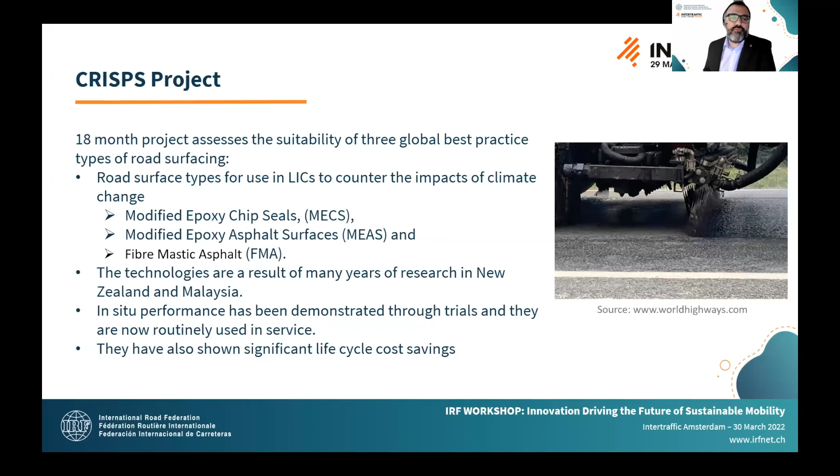Well, the project idea is, can we use that data and rely on it in other countries, specifically low-income countries? And how would the performance compare to normal practices? That's the whole idea of this project.

So this is the condition prediction model, HDM-4. I don't know if you're familiar with it, it was developed partially by University of Birmingham and supported by the World Bank. Using HDM-4, we are developing different scenarios, and the idea is to simulate the condition in Ethiopia using this tool.

As part of the project and in parallel to these activities, we do quality assurance, quality control measures, and that's work stream 3. I'll show you some of our findings in the next slide. Then we ship the materials. Epoxy is supplied by the US, and fiber we are importing from Malaysia. We are starting the trial very soon.

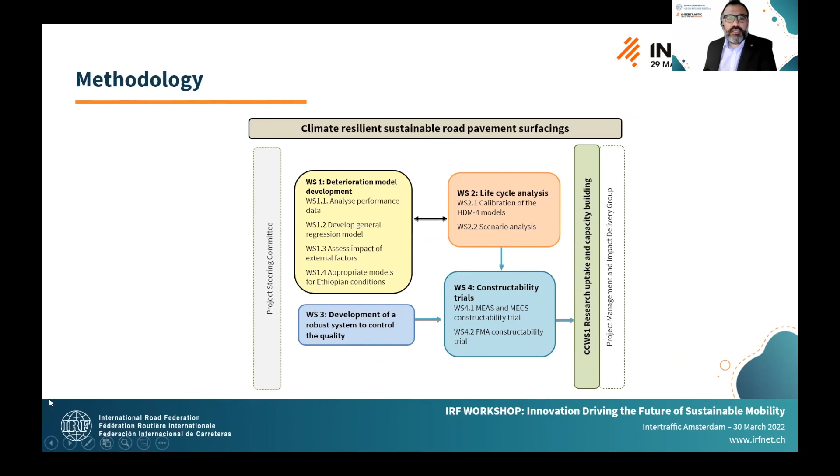So we have 3 different road sections and 1 control section, to address the trial constructability of these technologies. And then IRF is helping us quite a lot in disseminating activities. We have workshops and we try to engage with different stakeholders.

So on the innovation part, it is to really showcase the constructability and practicality of these 3 technologies in low-income countries. Yes, they are working in New Zealand, but climate is different in New Zealand compared to many low-income countries, and traffic is different. I was chatting with colleagues in New Zealand, they consider their situations low traffic, while the road sections we selected in Ethiopia are high volume transport, high volume roads.

So that's part of the whole idea, also to consider the climate change impact. As part of our project, I have to mention our partner ERA, Ethiopian Road Authority, is on board and they have been quite supportive of our project. I'm very thankful for their support.

We have a PhD student who has looked into climate change impacts on roads and road condition in Ethiopia. That's what we did as part of calibrating the HDM-4 models to consider climate change impact on road surfaces and different materials. Life cycle analysis is there as part of the HDM-4 model.

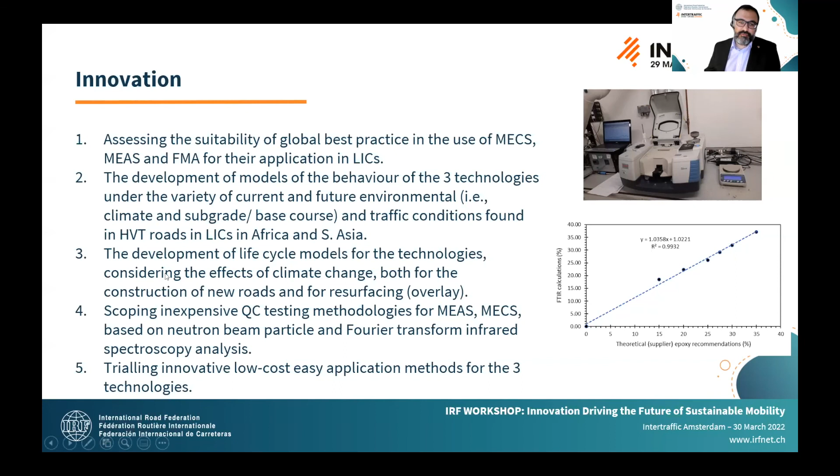Susanna, over to you, I hope it was on time. Meran, you've done a fantastic job, even going faster than the allocated time. I hope it wasn't too fast. No, it was very clear, and I thank you very much for that.

Here they can see you. Yes, I need to stop this. Yes, I don't know if you can see me on the screen. The logistics of this hybrid event are a little bit complicated.